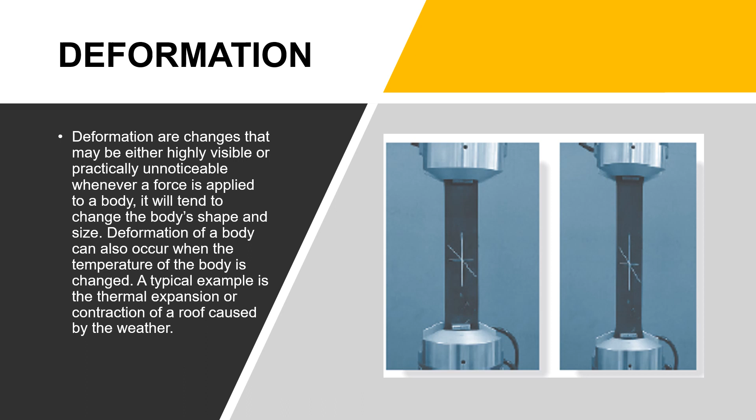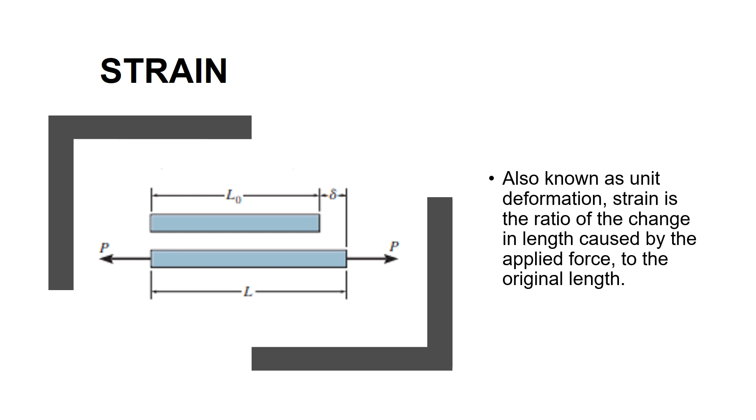So, firstly, we have normal strain. So, just like sa normal stress, ang normal strain natin is always perpendicular to the cross-section na ating kinoconsider. So, in this particular sample, we have here a bar. May bar tayo with a length L. So, may initial length siya, may L0 siya. Then, after we applied the force P, nagkaroon siya ng deformation. So, makita nyo in this sign, guys, yung delta, that is the deformation. Okay? So, usually, ginagamit yung delta as a symbol for deformation.

Okay? Then, we have the new length or the final length. Then, again, by definition, yung deformation divided by the original length, yun ang ating strain. So, it is also said here na yung ating symbol for strain is epsilon. Okay? So, just like sa stress, yung average na word ginagamit din for normal strain. Okay? So, pag may nakita kayong average strain, that is also known as normal strain.

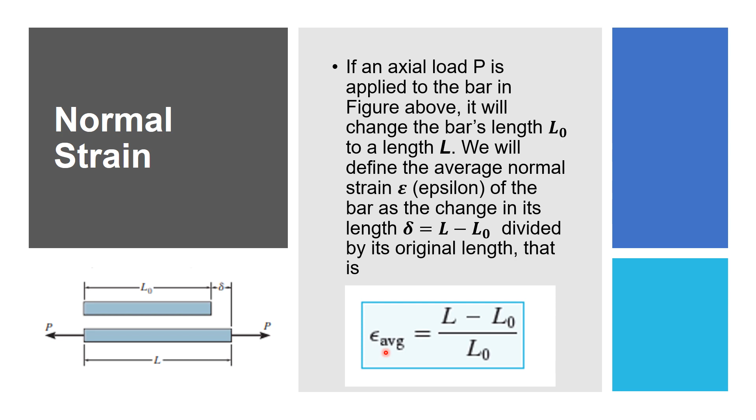So, next would be our shear strain. Okay. So, ang shear strain natin is gamma is equal to pi over 2 minus theta. So, by definition, kasi hindi lang po laging ang deformation natin is nakaka-elongate or nakaka-contract or umikli or mahaba yung body. Minsan, it also changes a direction. Okay? So, for example, meron kang plate, di ba? Meron kang plate and it's subjected, flat plate, for example, it's subjected to different forces. So, there may be some parts ng ating body na mag-elongate and some parts na mag-compress or magko-contract. So, in that particular case, some sides of the body may have larger angles.

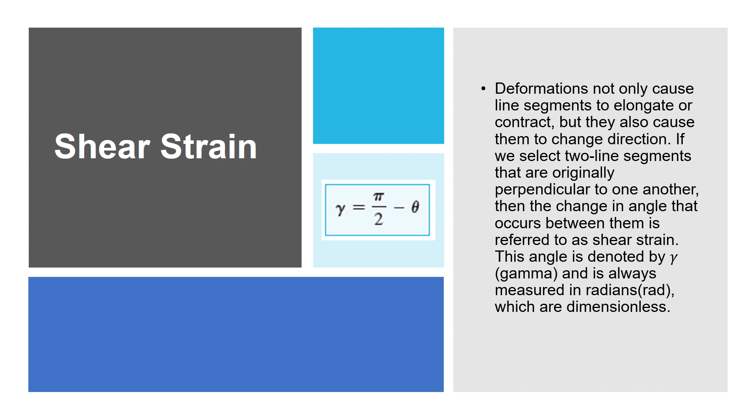So, in this case, dito papasok nga yung shear strain natin. So, hindi lang natin kino-quantify yung paghaba or pag-ikli ng body, we also quantify yung angles. Lumalaki ba yung angle or lumiliit? So dito po papasok yung shear strain natin. So in this particular part na shear strain, we are using gamma. As always, gamma po yan. And it is always measured in radians. Okay, kaya tayo may pi dyan. Naka-rad po siya. Okay. So next would be yung example natin.

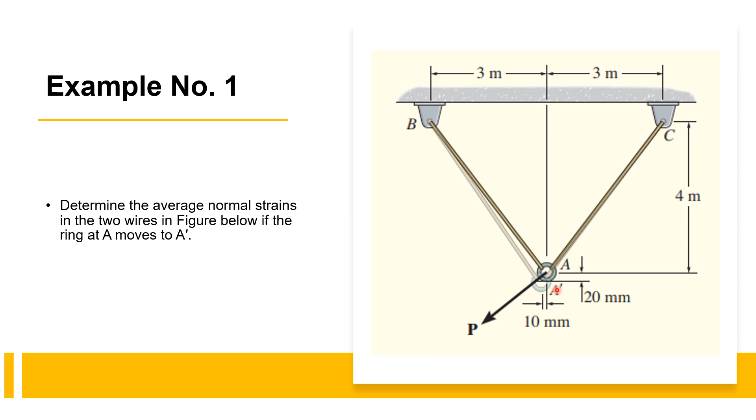So, it is also stated there kung ano yung naging movement. So, in this case, the ring moved downwards na 20 millimeters and then leftward na 10 millimeters. We need to establish kung ano yung mga givens natin, as I said, during our discussions para hindi kayo masyadong malito. So again, our ring moved 20 millimeters downward and then 10 millimeters leftward. So ngayon, again, we will have to know kung ano yung naging strain at each wire.

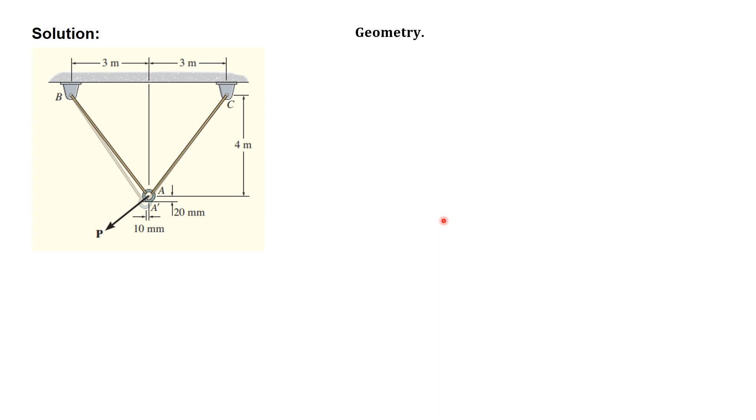So we have our solution here. So nilagay ko lang din yung ating figure. So by geometry, hanapin muna natin yung initial lengths ng mga wires natin. So we have here yung ating X and Y components ng wire, pag napapansin nyo. So we have 3 meters sa X component ng AB and AC. Then we also have a height na 4 meters.

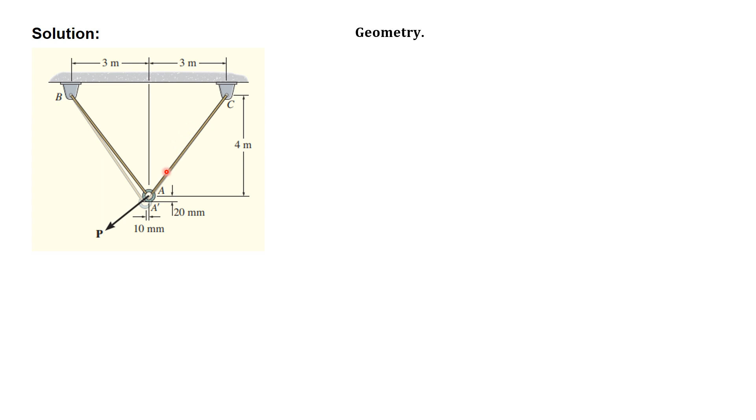So if you look at it from the initial position, so A muna tayo ha. From initial position, pantay sila. Pantay yung AC and AB natin. But we need to know yung initial length. So, in this case, the initial length would be the hypotenuse of the triangles with sides 3 and 4. So, kunin natin yon, we would have both lengths ng LAB and LAC na 3 meters squared plus 4 meters squared, then i-square root natin yun para makuha natin yung 5 meters.

So, we have determined na yung 5 meters natin, that is the length ng ating AC and AB. So, that is 5 meters. So, again, that is just by geometry. So, paano natin kukunin yung final lengths ng wire? Okay, so para makuha natin yung final lengths ng wire, still we can use Pythagorean theorem. Okay? So paano yun masasabi?

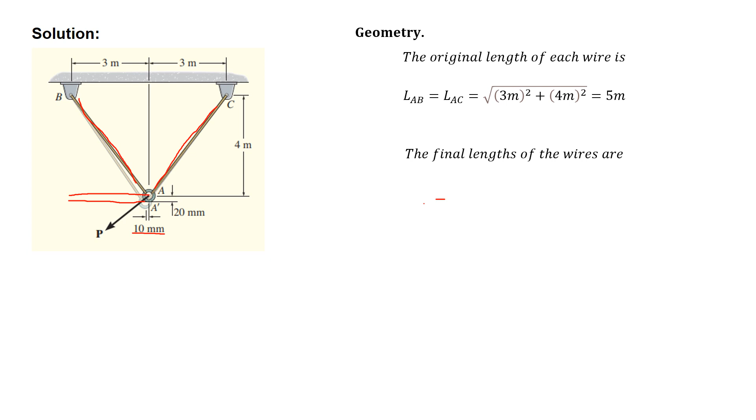From the X component na 3 meters, so itong 3 meters, so we have here, let me put a line para mas malinaw. So meron kang 3 meters, and then pinakita na nag-move ka to the left ng 10 millimeters. So ibig sabihin, umikli siya. Kaya ka nagkaroon ng minus. Okay?

Then, we also have yung movement ng ating Y. So, in this case, ito yung Y ng AB. So, sinasabi dito na bumaba yung ating AB, yung Y component. So, ibig sabihin, humaba siya. So, dahil humaba siya ng 20 millimeters, nagkaroon ka ng plus.

Okay? So, in this particular sample, medyo basic siya. Puro siya trigo kasi lengths yung ating hinahanap lang kadalasan. Ang idea here, if you know the initial length and you know the final length, makukuha mo na yung strain. Okay? So, going back, we have here yung ating final length ng AB. Kaya natin nilagay LA prime B, kasi yun na yung bagong posisyon.

LA prime B. So, next we have yung ating LA prime C. So, almost the same. Again, we'll just need to know kung nag-elongate ba siya or nag-compress siya in the X and Y components. So, let me draw it again. Sa X component natin, we have here yung initial position na AC. Then, makikita natin na humaba siya, in terms of AC, humaba siya ng 10 millimeters. Kaya ka nag-plus. And then, sa Y component naman, same na humaba siya. So, kaya ka nag-plus.

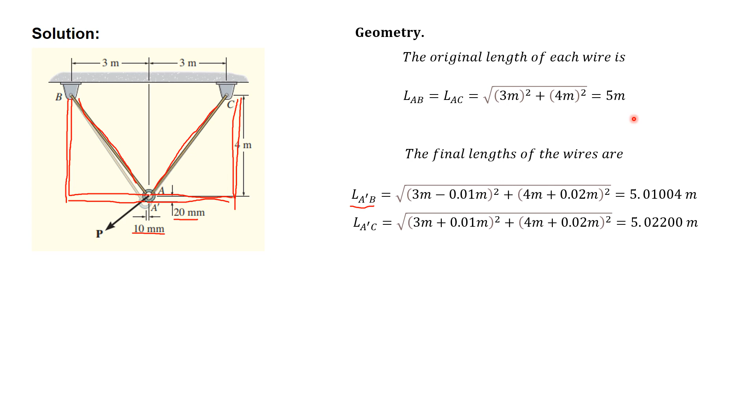So, if you remember our formula for strain, we need to know the initial and final lengths to get the answer, which is the strain itself. So, we will have the average normal strain for AB first. We have here the deformation. That is the final length minus the initial length to get the deformation, divided by the original length or the initial length. It's up to you what term you want to use. So, we have here the average normal strain for AB na 2.01 times 10 to the negative 3.

In this particular part, please do remember that strain is unitless, because it is known as the unit deformation. So it should have no unit. Because you are just referring, as always, to the original length. Depende sa original length palagi, yung nagiging strain mo. So that's why it became a ratio, in a way. That's why it's unitless. It became a ratio. Your answer itself is a ratio in terms of the original length. That's why it becomes a ratio or unitless.

Okay, so next is our average normal strain for AC. Same procedure. For AC, we use the initial length of AC, final length minus initial length of AC. Then we would have 4.4 times 10 to the negative 3. Same idea applies. Again, you just need to know the initial and final lengths. So you have the answers for both average normal strain of each wire. So those are our final answers.

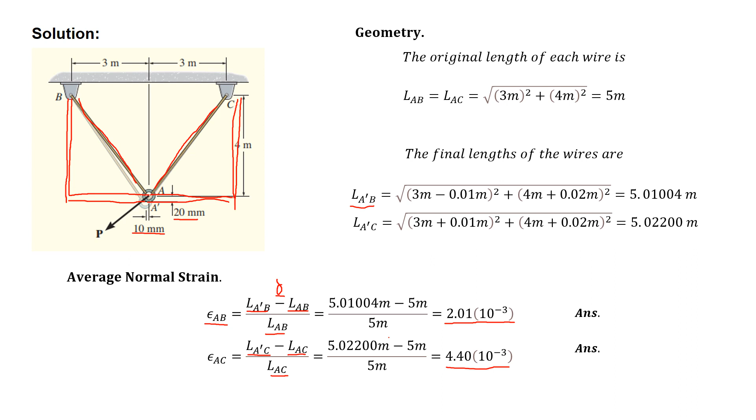So next we would have the next sample. We have here an initial lever bar. We have an ABC bar, connected by a pin at point A and then a cable to point D. At point D, we have a 300 millimeter length. And then we also have the force P applied. So it's stated here that when the force P is applied to the rigid lever arm ABC, the arm rotates counterclockwise. So as shown in figure B, our lever arm rotated counterclockwise.

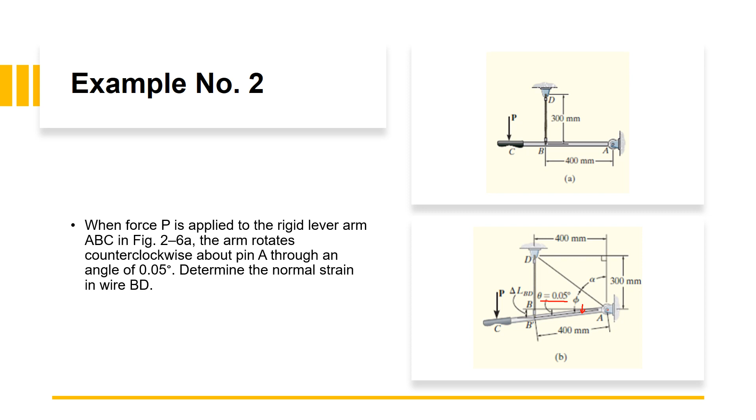So you can see, let me draw it. Counterclockwise was the movement. There was a counterclockwise movement from point A. We have an angle down movement of 0.05 degrees. So we're asked to find the normal strain at wire BD. So whether wire BD lengthens or shortens depends on the strain. So let's go to the solution.

I have here our solution. Let me paste the figure first. So by geometry, let's get the length of BD, or BD prime. B prime D means the new position or new length of wire BD. So in this case, we use an angle. We get alpha first, shown here. To get alpha, tangent of 400 mm divided by 300 mm.

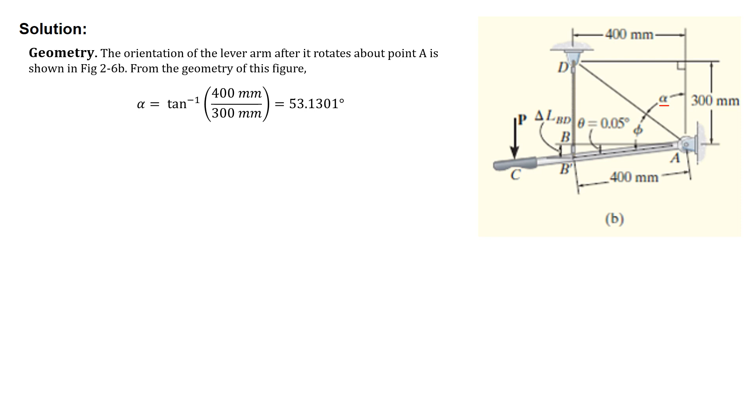Okay, we got alpha already. And then, let's get the angle, theta. Sorry, this is not theta, this is phi. So 90 degrees. Why 90 degrees? Because this is it, 90 minus the alpha we got, and then plus 0.05. Because our phi is from here going to the new position of the lever arm. That's why we want to get phi. So with that, we would have a phi of 36.92, and I think that might not be exact, since this is just a shortcut for the sake of the PDF and PowerPoint. But again, in your own solutions, we won't cut corners like this. So we have our phi here.

So let's get here again the initial length, the angle for triangle ABD. So we're asked to get the length AD. So for now, let's get AD. We have 300 mm squared, 400 mm squared, and that would be the square root. So we get 500 mm.

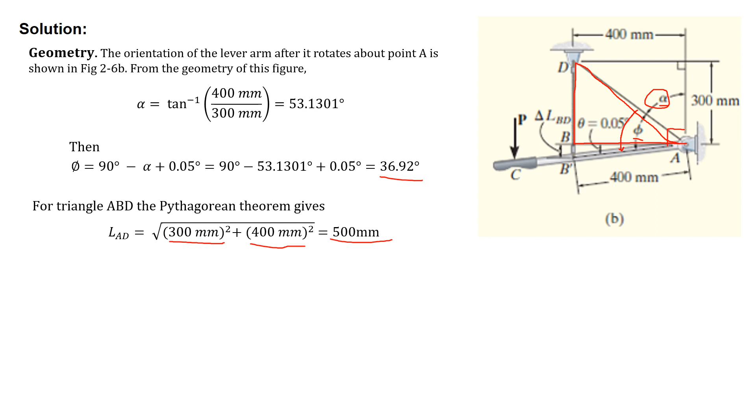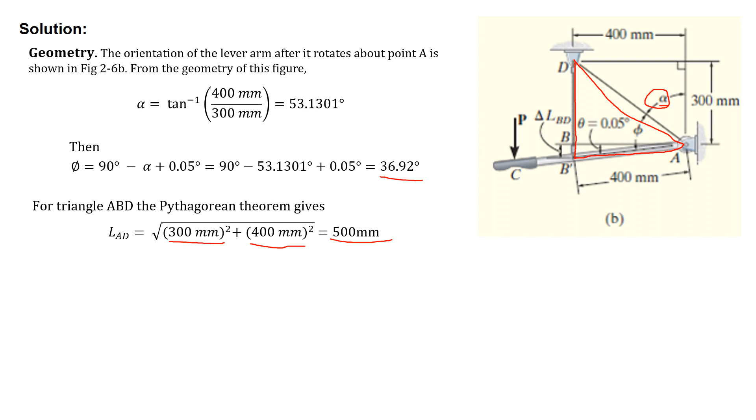So using the result from the previous problem, we will be applying the law of cosines. Why do we use cosine law? Because our new triangle, let me erase this for now, is not a right triangle anymore. So it becomes just a triangle itself, and that's why we use law of cosines.

We took the 500 because we can use this side for cosine law. So we have here LAD squared, which is the 500 we took, and LAB prime. Sorry, this is LAB prime. This would still be the same, 400, because it's the AB that moved.

That elongated. Then we still have minus 2 times LAD times LAB prime, times cosine phi, which is the angle we took earlier. That's why we took that again.

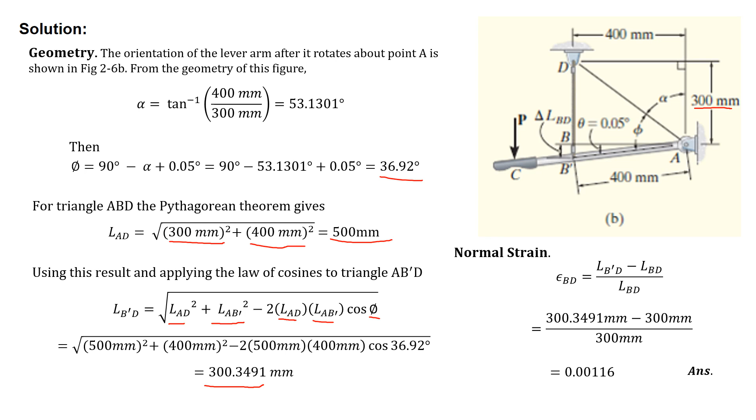So our next example is shear strain. We have here a plate shown in the figure, fixed along AB. So it's fixed here, AB, and it is held in the horizontal guides at its top and bottom, in this case AD and BC, so it has guides AD and BC like walls in a way.

If its right side, CD, is given a uniform horizontal displacement of 2 mm, that means at the top and bottom, all throughout CD, there is a 2 mm movement. It elongates by 2 mm. The whole body, the plate itself, elongates.

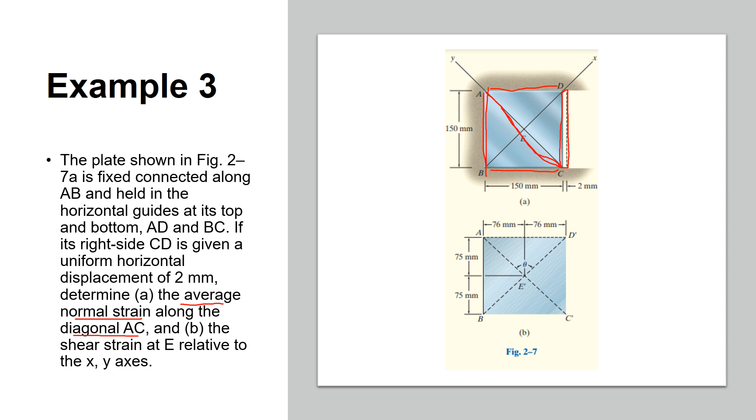We are asked to find the average normal strain along the diagonal AC. So that's it, we need to find the normal strain of AC first, and then we are also asked to find the shear strain at E relative to the X and Y axis. Okay, so let's move on to the solution.

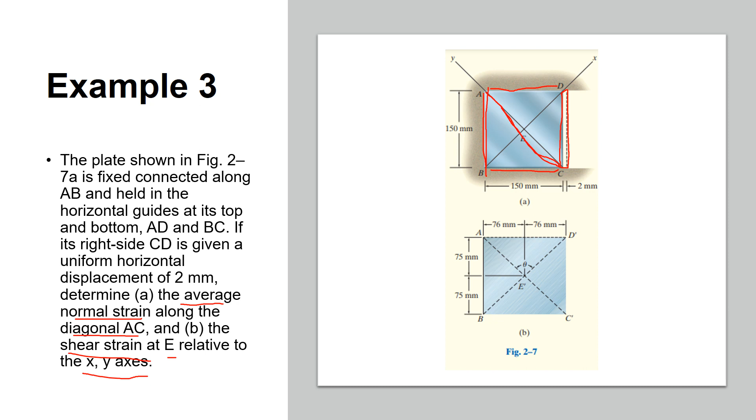So, let's move on to average normal strain, specifically the average normal strain of AC. Again, we need to know our initial length, the length of AC and AC prime that we're looking for.

For now, to get our normal strain, let's start with AC. We have our initial positions or initial lengths of 75 and 75, and these initial values of 75 and 75 are before the deformation, which is why I mentioned 75 earlier.

So we have here 150 mm, 0.15 m and 0.15 m. Let's use the Pythagorean theorem. Why 0.15 m? Because it's 75 to 75. So we would get the length of AC as 0.21213 meters.

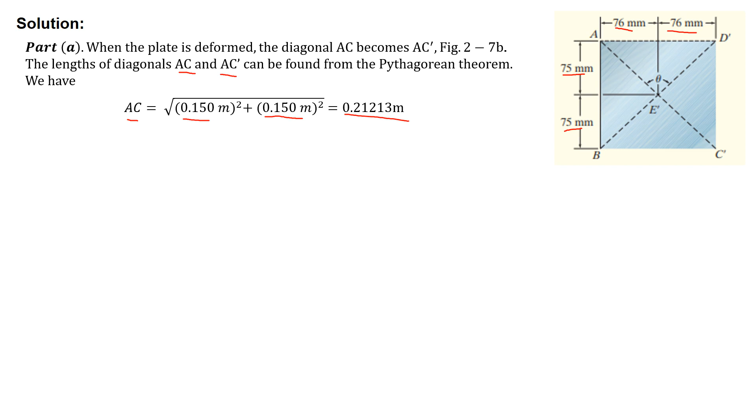I think that's not the complete solution, so please complete it in your own solutions. So we have an initial length of AC of 0.21213. Next we have AC prime.

For AC prime, we have here 150 or 0.15 meters and 0.152. Why is it like that again? Because we have 76 and 76. We just wanted the deformation of 2 millimeters to be divided equally between each, so the movement is equal since it comes from the center.

In a sense, you're just separating it, because it comes from, or if you want to get the center of the body, which is E, or in this case E prime, you place the deformation left and right of it, since your E prime is in the middle.

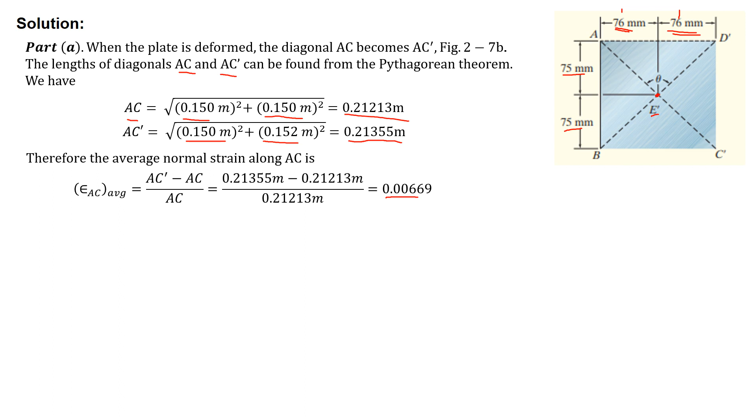So with that, you would have an AC prime of 0.21355 meters. Now we can get the normal strain or average strain of AC: AC prime minus AC over AC. As I said earlier, it's repetitive - the formula keeps repeating. We get an average normal strain of 0.00669, which again is unitless.

So the next part asks us to find the shear strain at E relative to the X and Y axis. So now, for the shear strain at point E, we place a theta, where that theta is an angle we don't know - that's the change we're looking for.

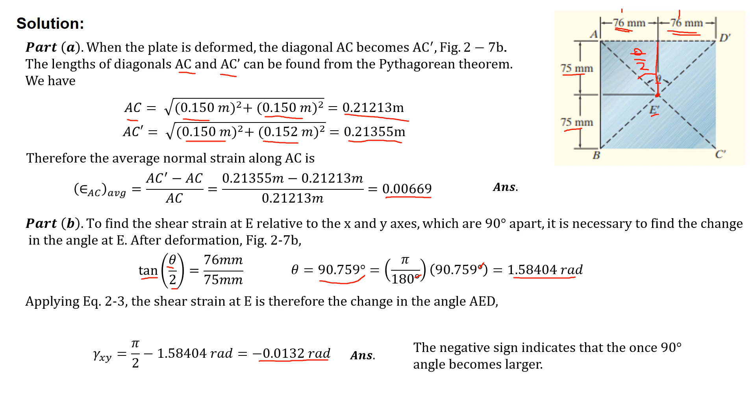So with that, our discussion on strain ends. It was quite short, even in the module itself it's quite brief, so I suggest you please read our reference material, which I've uploaded to our drive - it has many sample problems for strain. In your own time, please try to read it, not just read but understand it, so you won't be too overwhelmed if we encounter new problems. I hope you've understood the topic, and please ask me anytime if you have questions. Thank you.